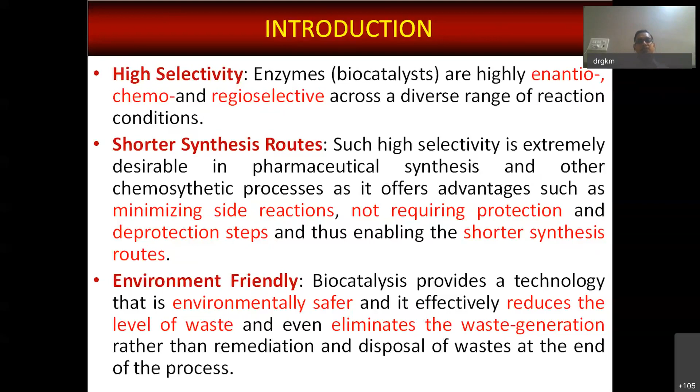Enzymes use a green chemistry approach. Biocatalysts have attractive features in the context of green chemistry and sustainable development. They are renewable and non-hazardous. As I have already said, biocatalysts like enzymes are normally derived from renewable sources like microorganisms, and they are biocompatible, biodegradable, and essentially non-hazardous.

Enzymes are made up of proteins. Proteins are of biological origin, like enzymes, and they have a certain life period. They do not exist in the environment for a very long time. So after our process is over, they can easily be degraded and gotten rid of. And because they are of biological nature, they are biodegradable, so they are essentially non-hazardous to the environment.

Then, enzymatic processes are economical also. Biocatalysts avoid the use of precious metals like palladium, platinum, and rhodium, which can contaminate the product and make product recovery difficult. This is not a problem associated with enzymes, because enzymes sometimes get degraded once the process is over, so there is no problem with their persistence in the product.

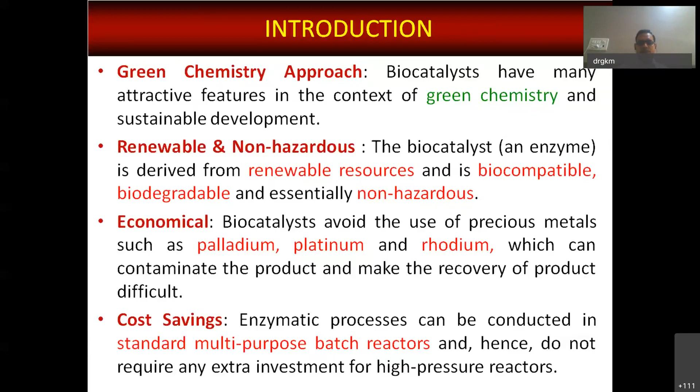High availability. Now, enzymes are normally produced by recombinant microorganisms. So, what are these recombinant microorganisms? These are basically bacteria or yeast systems in which the foreign gene responsible for the production of the enzyme of interest is cloned into that bacterium, fungus, or yeast, and there, with the help of genetic engineering, the protein is produced in very high quantity. So the cost of the protein itself becomes less because productivity has been increased.

Reusable. Now, development of efficient immobilization techniques and reusability of biocatalysts over many cycles has provided highly economical and energy efficient processes. Normally, the enzymes which are used at industrial scale for the production of different commodities are immobilized on certain matrices and materials, which enhances the life of enzymes, and they also increase the resistance of enzymes against adverse reaction conditions like high temperature, extremes of pH, etc.

So thereby, after immobilization, the same enzyme can be used for carrying out a number of reaction cycles, which is normally not possible with the free enzyme. So immobilization has provided us with the option to use the enzyme multiple times. So this also results in cost saving, and efficiency of the process also increases.

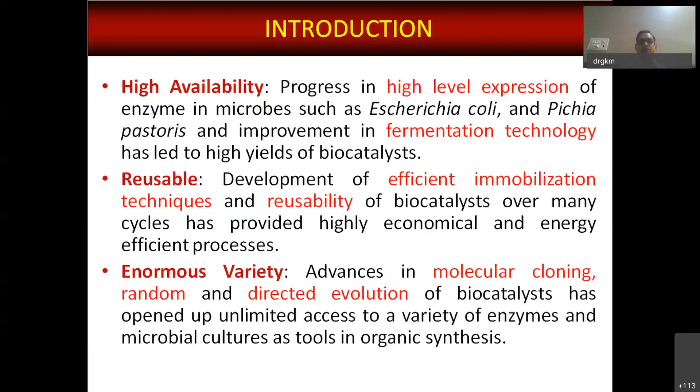Now we can make a comparison between chemical versus enzymatic processes. Chemical processes have relatively slow reaction rates as compared to enzymatic processes. Chemical catalysts like sulfuric acid, para-toluene sulfonic acid, or alkali catalysts like calcium, sodium, potassium hydroxides are generally used for carrying out biodiesel production, whereas enzymes like lipases are used for carrying out the production of biodiesels.

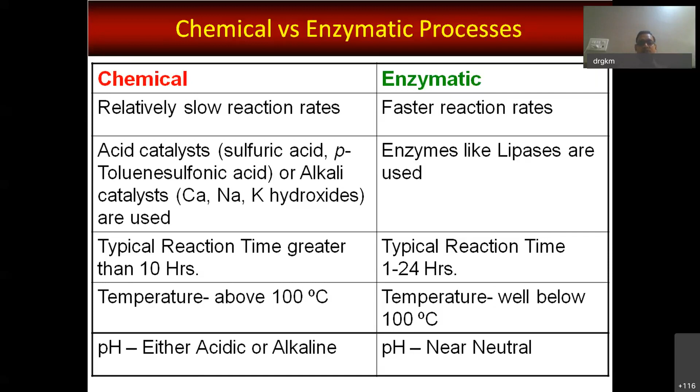Typical reaction times are greater than 10 hours in the case of chemical reactions, whereas enzymatic reactions have a wide range of reaction time, from 1 to 24 hours. Temperature in chemical reactions is generally above 100 degrees Celsius, whereas enzymatic reactions operate at ambient temperature, which is well below 100 degrees Celsius. pH in the case of chemical reactions is generally either acidic or alkaline, but in the case of enzymes, it is near neutral.

Now, chemical processes generally operate under high pressure. That is not the case with enzymatic processes. They can operate under atmospheric pressure. Specificity in the case of chemical reactions is less or non-specific, whereas enzymatic reactions are highly specific. A lot of waste or byproducts are generated in the case of chemical reactions, but in the case of enzymatic reactions, less or no waste or byproducts are generated.

Removal of chemical catalyst from the reaction mixture is difficult. However, in the case of enzymatic catalyst, removal is easy. Waste and byproducts are hazardous and unsafe for organisms in the case of chemical reactions, whereas enzymatic reactions result in waste or byproducts that are non-hazardous, safe to dispose, and not harmful to living beings.

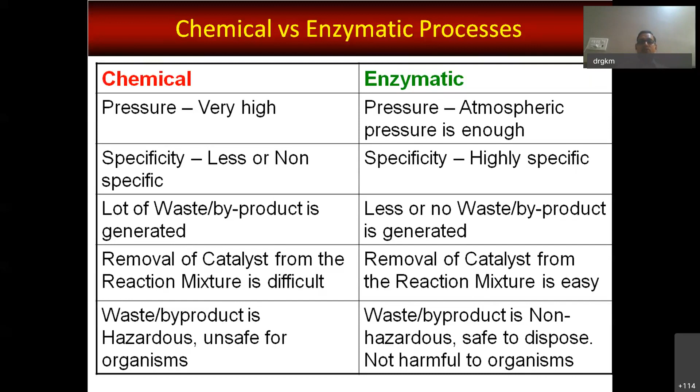Now, a brief introduction about the enzyme lipase, which has been used for carrying out the biodiesel production, which will be discussed in this presentation. So, lipases are basically triacylglycerol acyl hydrolases, which catalyze the hydrolysis and synthesis of esters of glycerol and long chain fatty acids. These show important catalytic properties of chemo-, regio-, and enantioselectivity. As is the case with other enzymes also, this is a typical reaction which is carried out by lipases.

So, in the reaction, the starting molecule is a triglyceride molecule, which is generally known as oil or fat. This, with the help of lipase and in the presence of water, is hydrolyzed to produce diglyceride and fatty acids. Subsequently, the diglyceride is also hydrolyzed by lipase, resulting in the formation of monoglyceride and fatty acids. And finally, the monoglyceride is also hydrolyzed to produce fatty acids and glycerol. This is a reaction which is carried out in the presence of water.

However, under microaqueous conditions, this is a reversible reaction, where synthesis of triglycerides can be carried out with fatty acids and glycerol in the presence of lipase. So, this is a typical reaction which is carried out by the lipase enzyme.

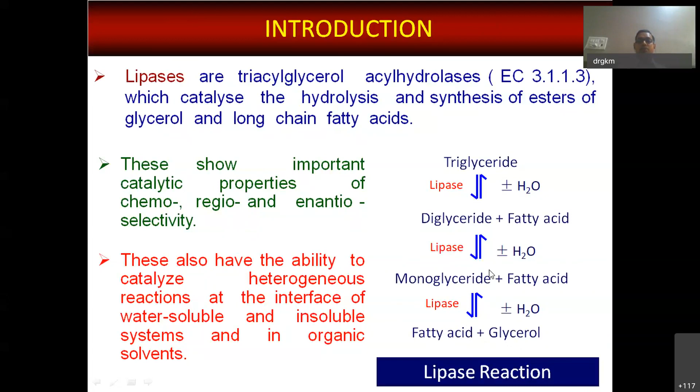These are the multiple applications of the enzyme lipase in different industries, starting from oleochemistry, detergents, pharmaceuticals, agrochemicals, wastewater treatment, leather processing, pulp and paper industry, polymer synthesis, organic synthesis, food and dairy. So these are some of the applications which are carried out by the enzyme lipase.

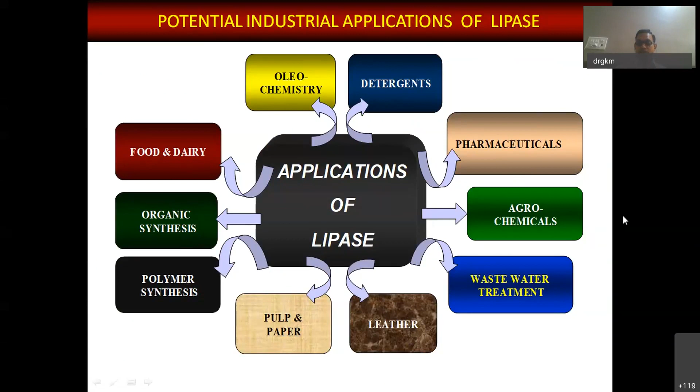Now, a brief introduction about the biodiesel. Chemically, biodiesel is a fatty acid alkyl ester, which can be synthesized by chemical reactions. Chemical reaction between alcohol, that is methanol, ethanol, or even butanol and propanol has been used as the alcohol, and oil or fat, which includes vegetable oils, animal fats like lard, tallow, kitchen waste, that is mainly rich in oil, insect and microalgal oils, in the presence of a suitable catalyst like an alkali or acid or an enzyme.

Catalysts investigated for transesterification are either acids, bases, both liquid and heterogeneous, as well as free or immobilized enzymes have been used for the production of biodiesel from oils and alcohols. Lipases have been used for catalyzing the synthesis of biodiesel. Current industrial processes for biodiesel production use either alkali, like KOH or NaOH, or acid like hydrochloric acid, sulfuric acid, or phosphoric acid as catalysts.

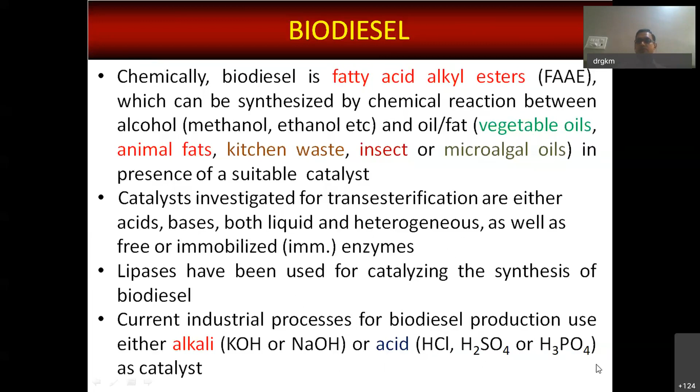Both these chemicals are efficient catalysts for the synthesis of biodiesel from fresh vegetable oils and alcohol. Both these chemicals, that is the various acids and alkali, have been discussed in the previous slide. However, when it comes to the use of spent or waste vegetable oils as substrates for biodiesel production using alkali or acid as catalyst, the conversions obtained are poor. The reason is that used or spent vegetable oils are rich in free fatty acids, and both alkali and acid are poor catalysts to carry out the efficient production of biodiesel from the used oils.

The reason is that biodiesel can be produced in two ways. The first way is we can use fresh vegetable oils which can be esterified to alcohol. And here the acid catalysts and alkali catalysts are equally good. They can carry out the process of transesterification that will result in the production of biodiesel.

However, in the case of spent or waste vegetable oils, these are rich in free fatty acids. And alkali specifically and also acid are poor catalysts when they have to esterify free fatty acids to the alcohol moiety. Whereas lipases have the ability to carry out both the reactions. They have the ability to carry out transesterification reaction as well as the esterification reaction. So transesterification is the reaction between triglycerides of vegetable oils and the alcohol, whereas esterification is the reaction between free fatty acids and the alcohol.

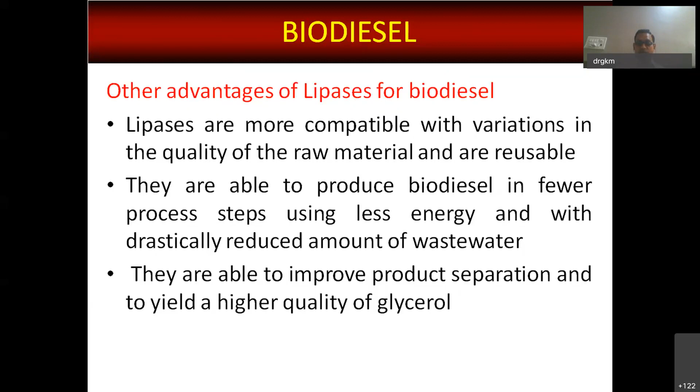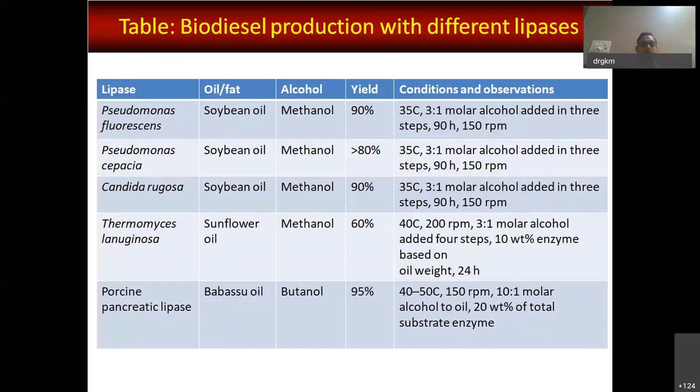So these are the conditions mentioned in the literature for the use of various different kinds of microbial lipases for the production of biodiesel.

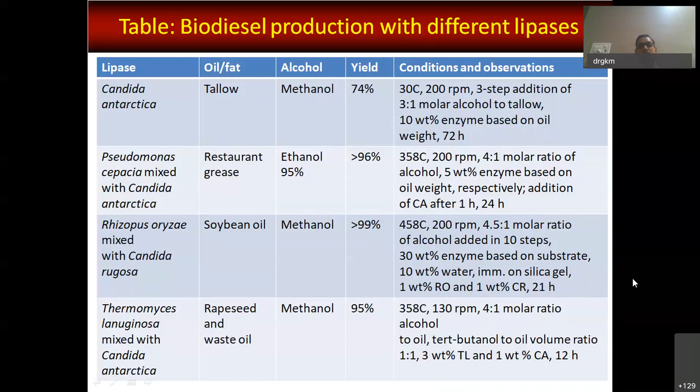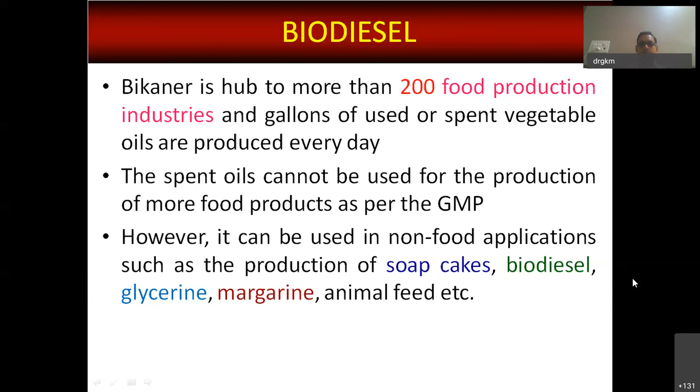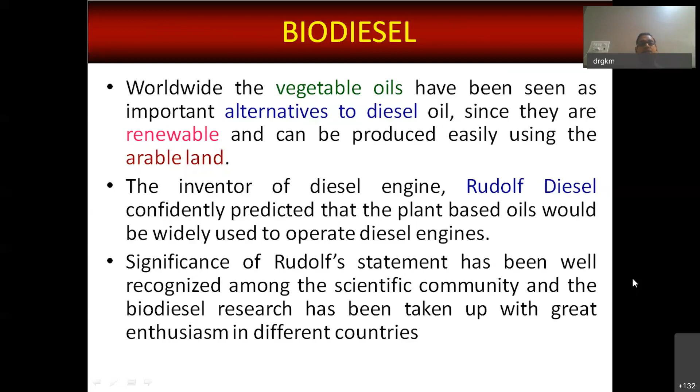Now, according to 2017 statistics given on the statistical portal, global biodiesel production has been led by USA, which produces 6 billion liters of biodiesel. This is followed by Brazil, which produces 4.3 billion liters. Then Germany, 3.5 billion liters. Then Argentina, 3.3 billion liters. Indonesia, 2.5 billion liters. France, 2.3 billion liters. Thailand, 1.4 billion liters. And Spain, 1.3 billion liters of biodiesel.

Although biodiesel refers to fatty acid esters of both methanol and ethanol, researchers have given more focus to fatty acid methyl esters, that is FAME, than FAEE. So here the focus of discussion shall be confined to FAME.

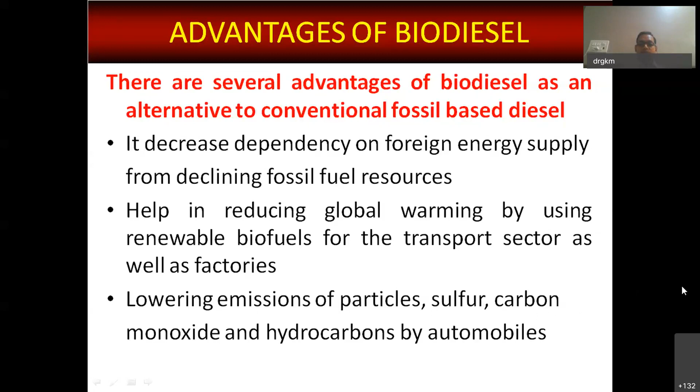Biodiesel can be produced from fat, lard, that is animal fat, tallow, also animal fat, and vegetable oils. These mixtures of fatty acids and triglycerides need to be chemically altered to fatty acid alkyl esters, known as FAAE, to be useful as biodiesel fuel for currently used diesel engines.

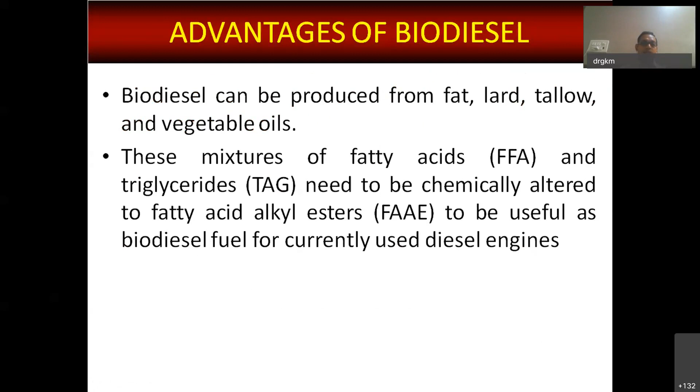Now we come to biodiesel production. Conversion of substrates, that is the oils, to biodiesel has been observed in the range of 88% to greater than 98% using lipases, similar to the conversion obtained with chemical catalysts. However, lipases provide one additional benefit of environmentally benign processes that operate under mild reaction conditions: temperature below 100 degrees Celsius, pH near neutral, and normal atmospheric pressure. This circumvents the requirement of costly corrosion-resistant equipment and enables substantial cost savings in terms of low energy requirement and no waste disposal problems.

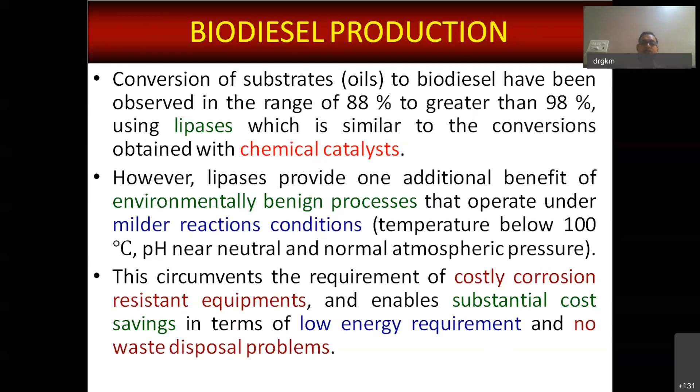Worldwide, various vegetable oils are being considered as fuel substitutes in engines. These include Karanja oil, cottonseed oil, rice bran oil, sunflower oil, soybean oil, rapeseed oil, Madhuca latifolia oil, jatropha oil, etc. However, the major obstacle in the commercialization of biodiesel is the cost of production, which relies mainly on the oil substrate, which is not cost effective to use. Under the current scenario, considering environmental pollution and developing a commercially feasible biodiesel production technology, waste cooking oils have been reported as sustainable substitutes for fresh vegetable oils.

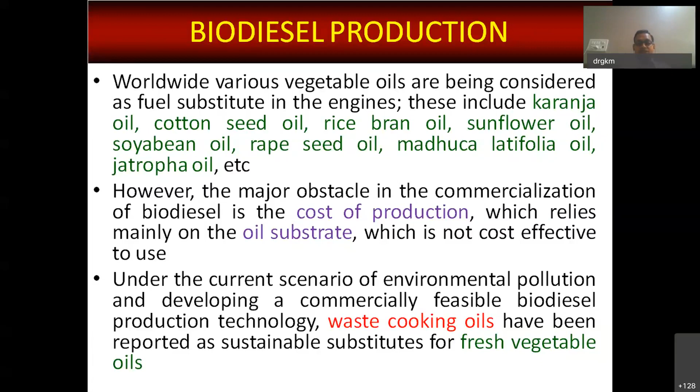This is a typical reaction scheme for an industrial production process. This is a traditional biodiesel process, with an acidic pretreatment step followed by alkaline catalysis.

So this is a bioreactor which is being fed with oil, which is having free fatty acids also. Another substance, methanol, is also added here, and to this sulfuric acid is added. This is the acidic pretreatment process, because as we know, the spent oil or used oil is very rich in free fatty acids. So this pretreatment step is important because it reduces the free fatty acid content in the oil as well as precipitates the other impurities which are there in the used oil. So this first step reduces the acidity of the oil.

Thereafter, after the treatment, this moves to container B, which is basically a separator, that is a centrifugal or decanter. Here in the centrifuge, the reaction mixture is centrifuged, which results in settling of the water and sulfuric acid, and this is directly passed to vessel D, which is our product purification and alcohol recovery vessel.

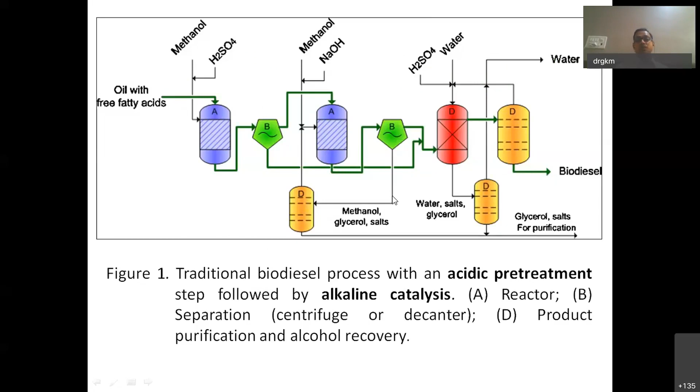When comparing both, you can see the chemical-based process requires a lot of equipment, and it is a multi-step process. It requires two reactors for carrying out the production of biodiesel, and also there are requirements for other vessels. Two decanters or centrifuges are required. Whereas in the case of the enzymatic process, the requirement of equipment is less, so the process itself, in terms of input on the equipment, becomes cost effective.

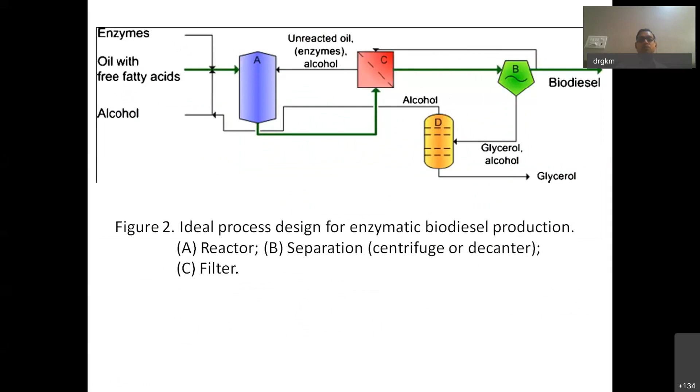However, the liquid enzyme can also be used. Specifically for the biodiesel reaction, we can use either the lyophilized enzyme as well as the liquid enzyme. Both options are available with us.

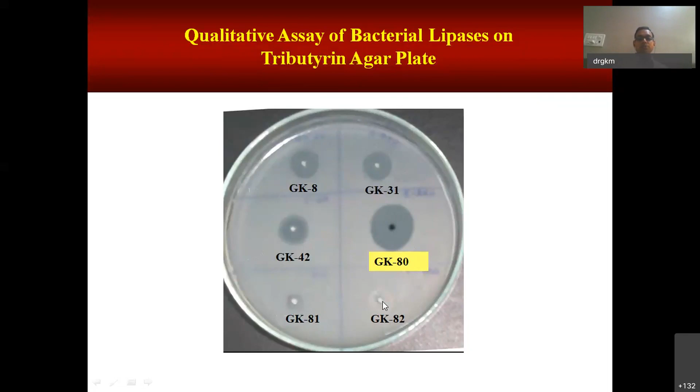So this is a typical reaction scheme which we have used for the production of biodiesel using the lipase. So we have used 9.65 grams of waste cottonseed oil. To this we have 0.35 grams of methanol, and to this we have 0.3 grams of lipase as the catalyst here. And the reaction was carried out at 37 degrees Celsius at 150 RPM for 24 hours.

However, samples were taken during the process of reaction at different time points, and the samples were centrifuged at 6000 RPM for 2 to 3 minutes to separate the biodiesel layer from the layer of glycerin and water. Then the biodiesel layer was analyzed for biodiesel production using the thin layer chromatography method.

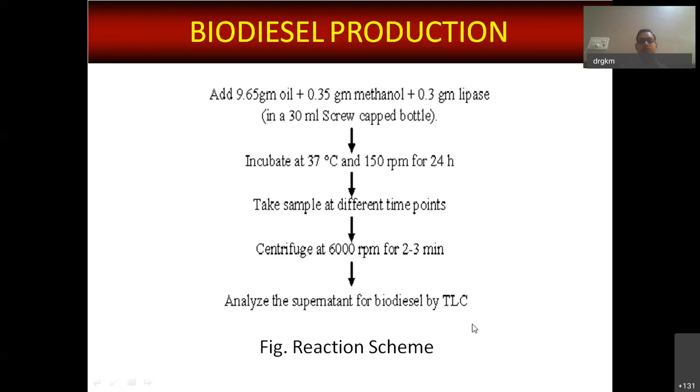Analysis of the biodiesel production. We have carried out two analyses for biodiesel production. First is qualitative and second is quantitative. And for qualitative analysis of biodiesel synthesis, we performed thin layer chromatography. Samples from the reaction mixture were taken at different time points and they were spotted onto silica gel TLC plates. The plates were run using a solvent system as mentioned below.

The spots of the leftover reactants and products formed during the reaction were visualized by placing the TLC plates in an iodine chamber. This solvent system was used to run the spots of the reaction mixture on the TLC plates. It is comprised of three chemicals: petroleum ether, diethyl ether, and acetic acid in the ratio of 45:50:1.

And quantitative analysis. Quantitative determination of biodiesel synthesis by the selected lipase was performed by titrating the leftover fatty acids, that is the fatty acids which did not react with the oil, with 0.1 normal NaOH solution. Similarly, the fatty acids present in the control experiment done without lipase were also titrated. The volume of sodium hydroxide consumed in the test was subtracted from the volume of NaOH consumed in titrating the control. The subtracted value obtained was used to calculate the percentage conversion of oils to biodiesel.

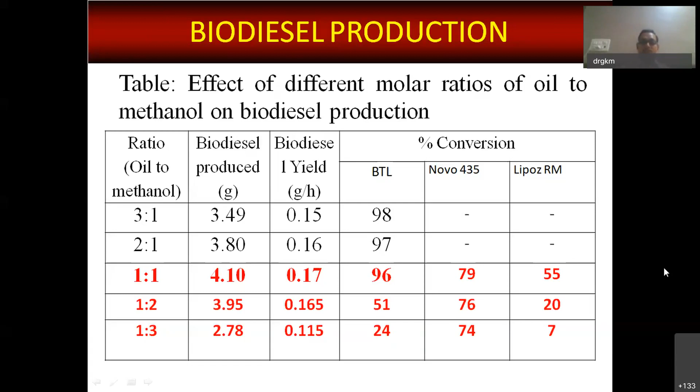So the reason behind this is that with the increasing temperature, we know that the rate of reaction increases. That is very well known. However, with the increasing temperature, the enzyme structure, which is made up of protein, the energy of those molecules is also increasing, and thereby they tend to move away from one another, and this results in unfolding of the enzyme. Thereby, the activity of the enzyme also decreases.

So, temperature has to be balanced. It should not be beyond the optimal tolerance of the enzyme, the temperature which can be tolerated by the enzyme. Otherwise, the reaction will not go in the forward side.

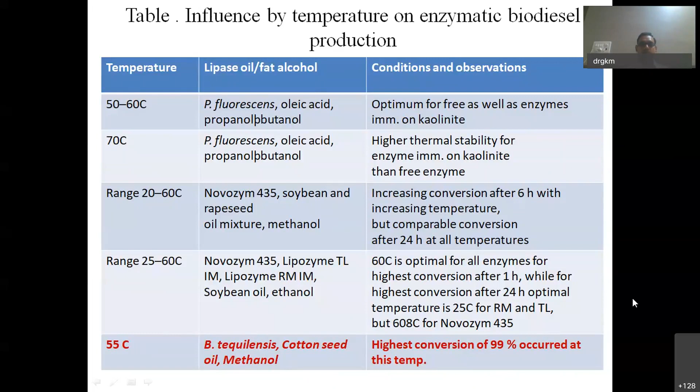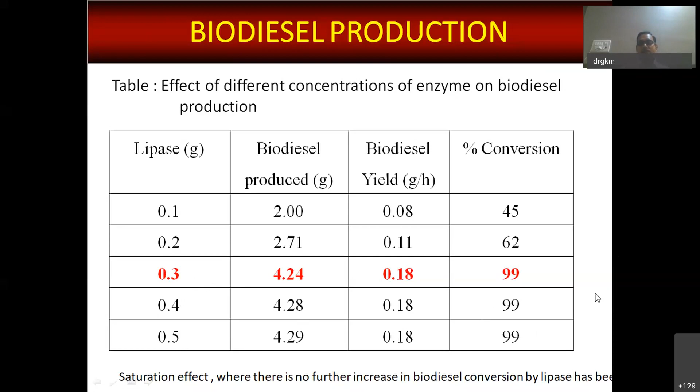However, upon further increasing the concentration of enzyme, there was no increase in the conversion of the substrates to biodiesel beyond 99%. The reason is that 0.3 is the concentration at which the substrate molecules have been completely utilized by the enzyme. On further increasing the enzyme concentration, because the substrate concentration has not been increasing correspondingly, the conversion is not increasing, because all the substrate has been occupied by 0.3 gram of the enzyme. So further increasing the concentration of enzyme will not result in any further increase in the conversion rate. However, 99% conversion itself is near 100%.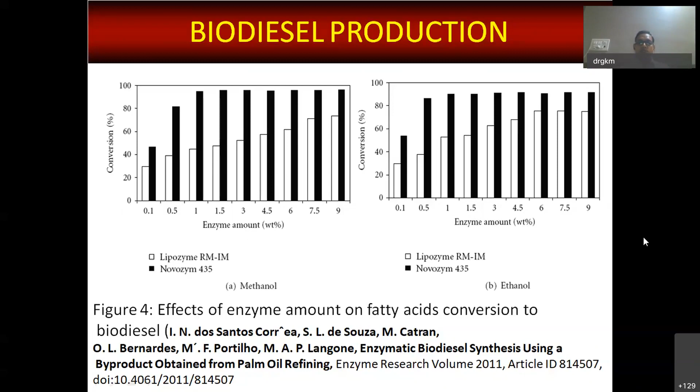However, in the case of Lipozyme RM, we did not see this observation. Here, with increasing concentration of the enzyme, there is an increase in the conversion of the substrates to biodiesel. So, similar in both cases, whether it is methanol or ethanol.

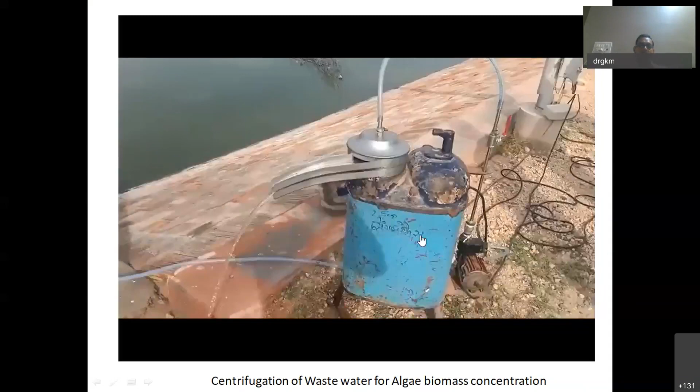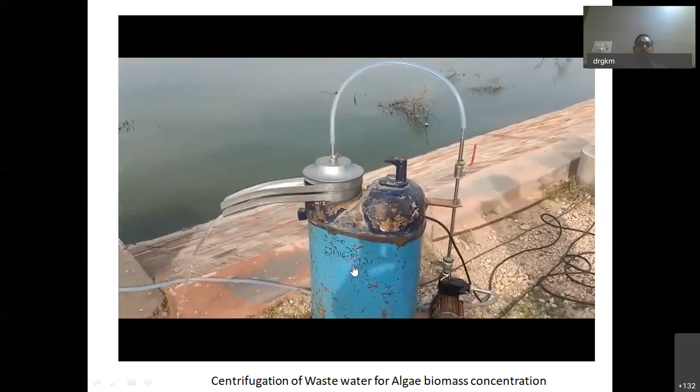This is another aspect of our research work, wherein we are using algae from wastewater. This is a wastewater pond in which algae is growing, and using this centrifuge, we are collecting the algal biomass. This is basically a centrifuge which is used for separating milk fat from the milk. So this is what we have used. And here, after the centrifugation process is over, we are removing the biomass from the rotor of the centrifuge.

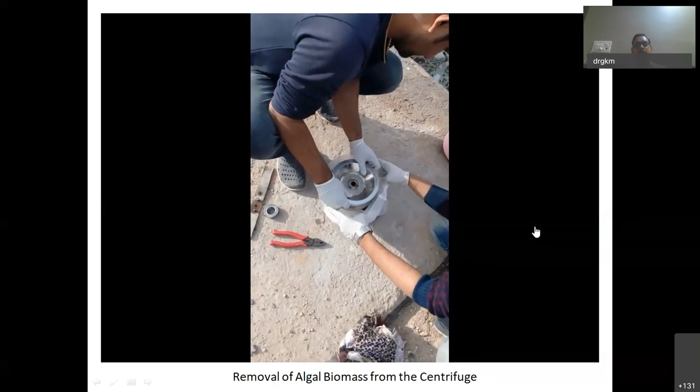So we have used a locally available substitute centrifuge, which is normally used for the separation of milk fat from the milk. This is a kind of continuous centrifuge which can be used to collect a good quantity of algal biomass from wastewater bodies. That is basically a sewage treatment plant located in the vicinity of our university. So these are my students who are opening the rotor to get the algal biomass out of it.

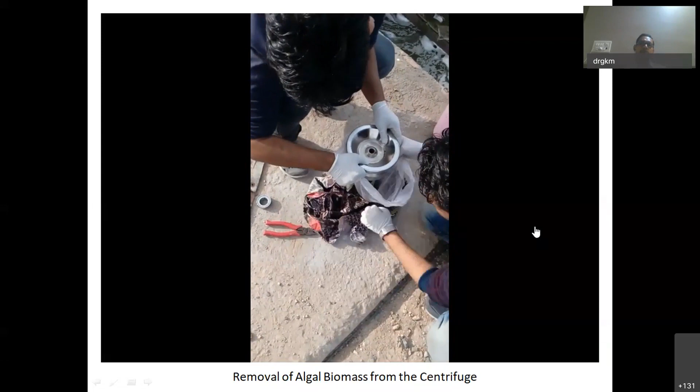This centrifuge is actually composed of a number of plates. You can see the algal biomass is accumulated between the plates. So they are taking out the plates and trying to collect the algal biomass into a plastic bag. So the algal biomass has basically accumulated on the inner surface of the rotor.

This is how a good amount of algal biomass has been obtained by centrifuging wastewater from the treatment plant. We can say with the available resources, we try to separate algae from the water body.

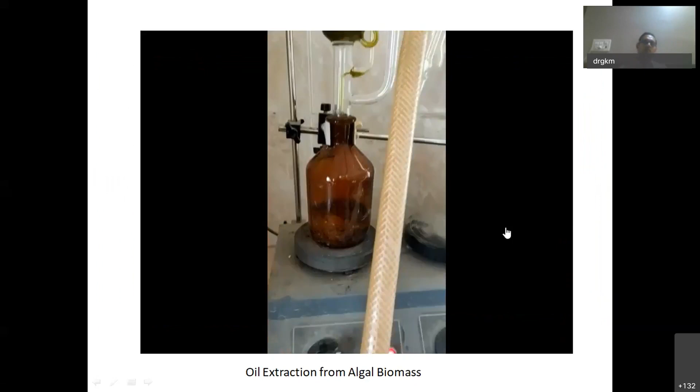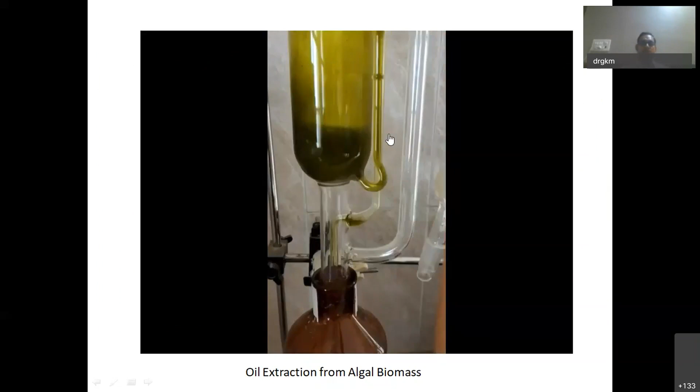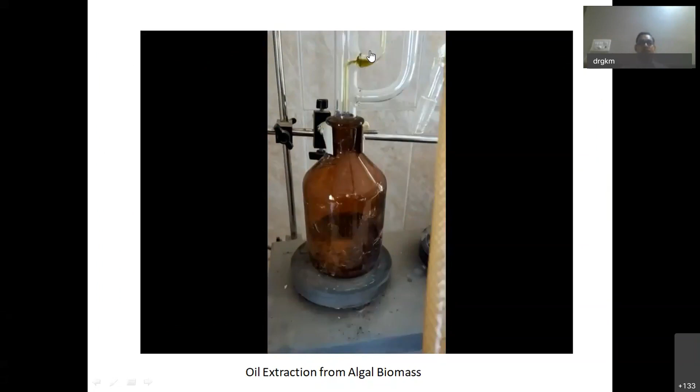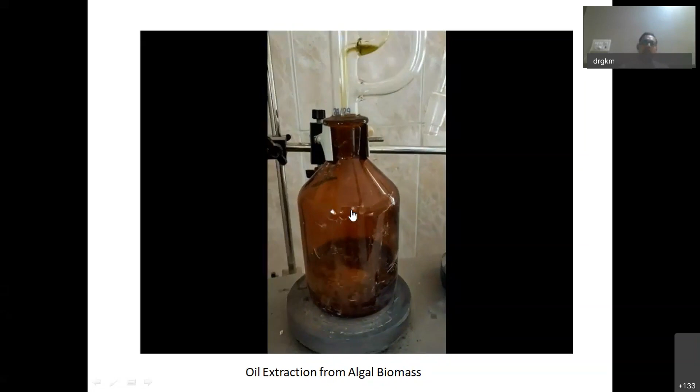This is how we are extracting oil from the algal biomass. This is the dry algal biomass which has been put into the thimble, and this is a reflux system. The solvent which we have used is hexane. So the hexane is extracting oil out of the algal biomass, and it is refluxed into the same system, and the system operates for 2 hours, during which time the complete extraction of oil occurs from the algal biomass.

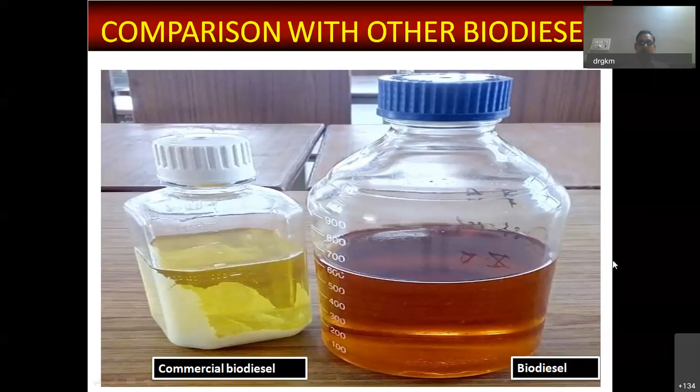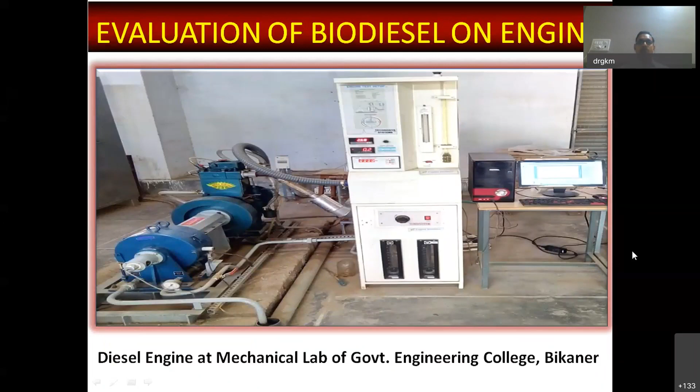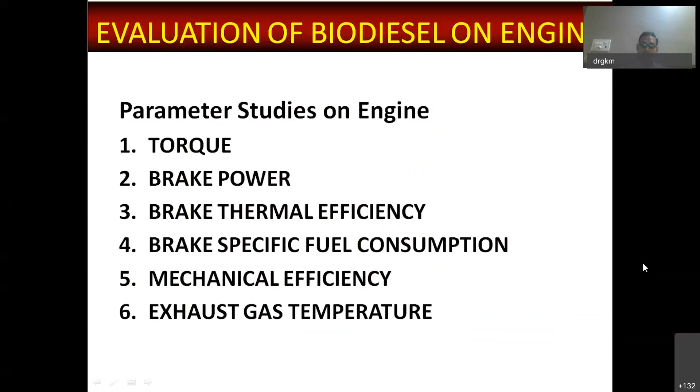After the production of biodiesel, with the help of Engineering College Bikaner, we have evaluated our biodiesel for engine performance also. This is the mechanical lab of Engineering College Bikaner, wherein evaluation of our biodiesel was carried out. The biodiesel was evaluated for the following parameters: torque, brake power, brake thermal efficiency, brake specific fuel consumption, mechanical efficiency, and exhaust gas temperature. These are our results.

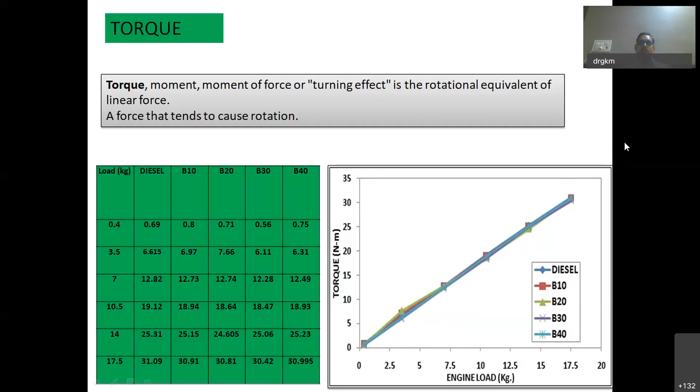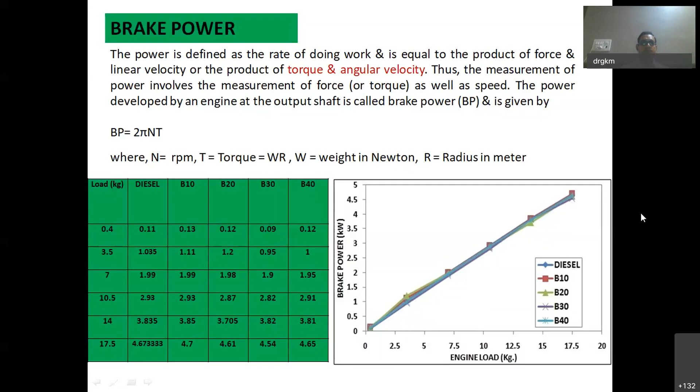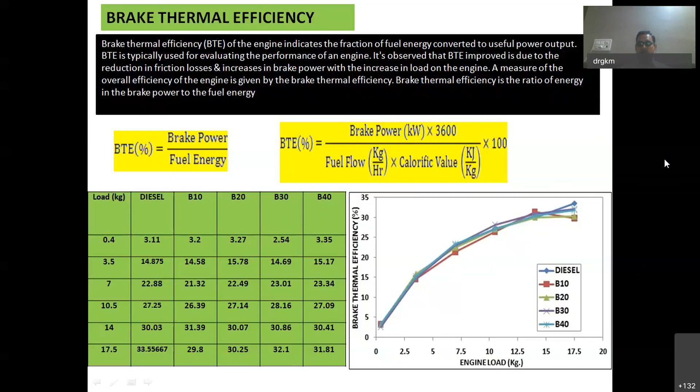And here also we can see this fossil-based diesel and the increasing blends of our biodiesel; the results are very much comparable, besides some deviations at the terminal side of these graphs. So from the point of brake thermal efficiency also, the biodiesel is comparable to the conventional fossil-based diesel.

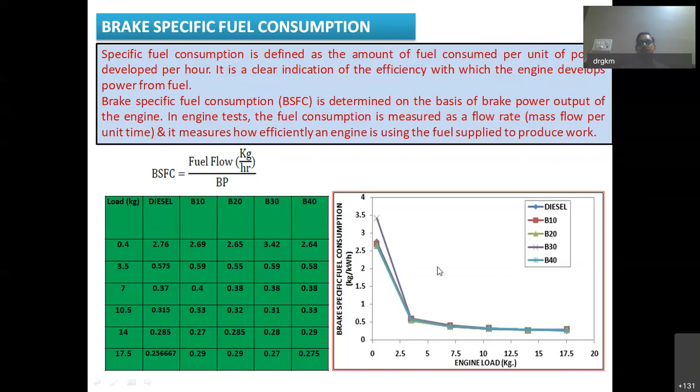And mechanical efficiency. Mechanical efficiency is the ratio of brake horsepower, delivered power, to the indicated horsepower, power provided to the piston. The heat energy which is converted to power and utilized to drive the motor is called indicated power. The mechanical efficiency is a measure of effectiveness of the system, and it can increase or decrease with the load.

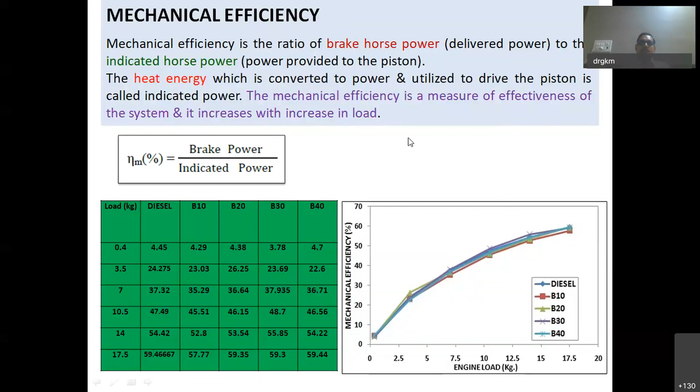So from this graph also we can observe that the results obtained with the different blends of biodiesel for this particular mechanical efficiency are also very much comparable to the results obtained with conventional diesel.